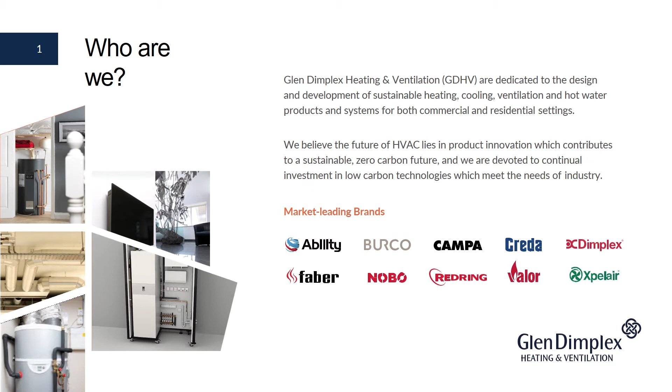As part of that research, we've produced a report launched this week which talks about how technologies are going to change, primarily in new buildings in the UK. And from that report is a summary of a CPD, which I'm going to present to you today. We have only 30 minutes for an hour CPD, so I've taken a number of the slides out, you'll be glad to know, rather than just rattle through it at twice the pace.

This CPD will cover the key drivers and the future outlook, what the Future Homes Standard actually is, and what the 2020 Part L and F review of the building regulations are on our way to it, and some of the other things that we can expect to contribute to that situation.

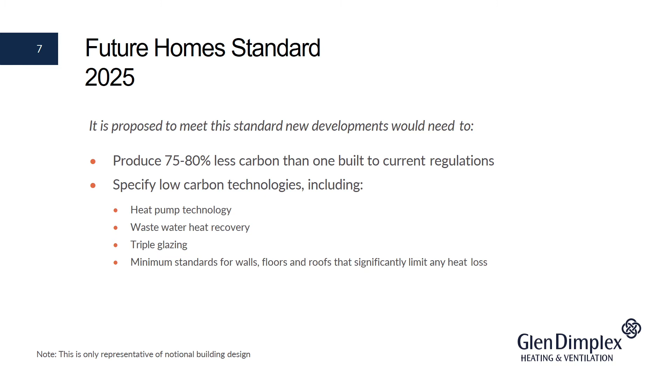So in summary, the standard looks to reduce carbon emissions by up to 80% over the current building regulations, and that's a significant change. To do that, it starts to introduce the technologies that might be required to get us there. So heat pump technologies, heat networks, electrification.

One of the ways that it starts to describe how we might move there in the building regulations is the concept of a notional building. But in my experience of talking to people about this, it actually confuses people more. There's a listed set of technologies which could be used to achieve the new regulations. They're not prescriptive, they don't have to feature there.

As long as all of the minimum requirements are met and the targets are hit, any mix of technologies can be used. And today, once we've covered what the regulations are, is really about modeling how some of those technologies look within our buildings.

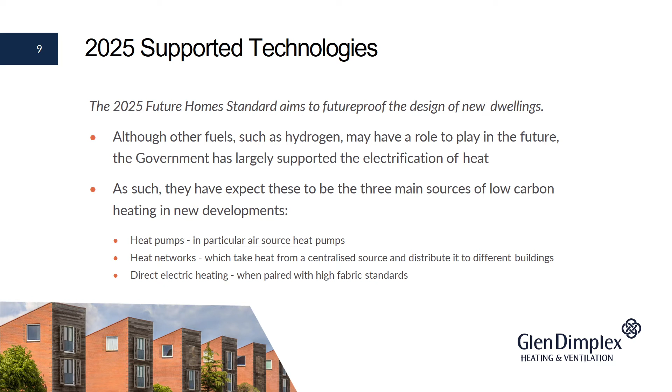So although other fuels such as hydrogen absolutely have a part to play in the future of our buildings, the government has largely supported electrification of heat. This is through heat pumps, heat networks, and direct acting heating. And the reason that electrification has really been supported is because of the change to our power grid.

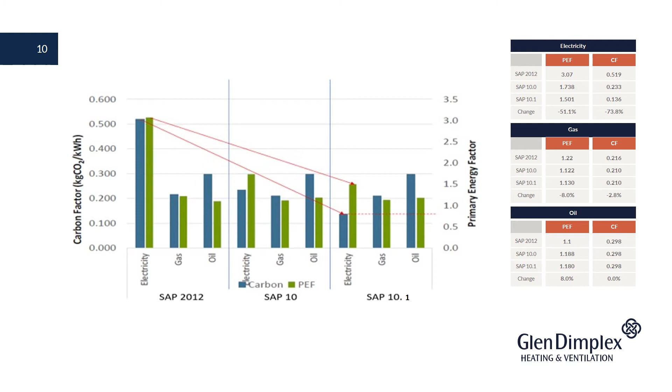That leads into Part L and Part F, so conservation of fuel and power and ventilation. The building regulations are being changed this year to meet some of the criteria that are required as a step towards 2025 and beyond. So in England, the plan is to release 5 consultations, including the Future Homes Standard. These will look at the new residential buildings, existing residential buildings, new commercial buildings, existing commercial buildings, and a separate consultation on overheating within buildings.

The first of these, which is what this report's based on, which is the new dwellings, that has consultation closed on 7th of February, and the response to that is due in the summer, and it will be applied by the end of the year. So regulation not known for moving quickly, but this certainly seems to be happening at quite a pace.

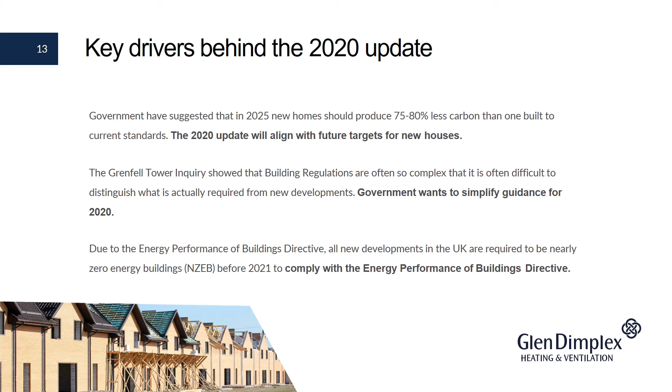And the main reason for that, although we need to get towards our targets early, is to be compliant with the Energy Performance of Buildings Directive. To meet the EPBD, we have to have NZEB buildings, so near zero energy buildings, and they must be measured in primary energy. Our current building regulation system uses carbon, and so that has to be changed to introduce primary energy as a factor.

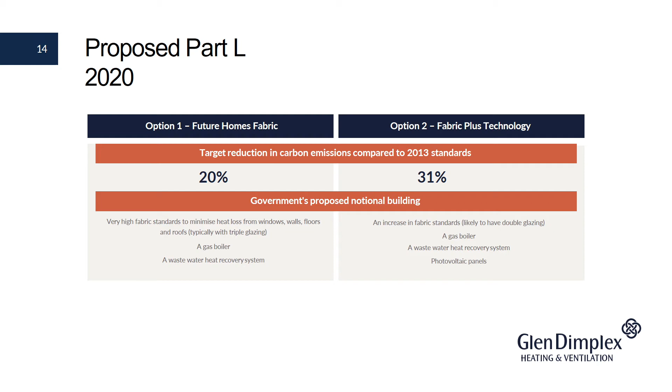The proposed changes to Part L have 2 options. Option 1 is a 20% emission reduction over current building regulations, and option 2 is a 31% reduction over current building regulations. Notional buildings are listed below. However, introducing primary energy and tightening up on carbon emissions are not the only targets, and the minimum standards for insulation and also for installed services have been tightened, and there's also been the addition of an affordability rating.

Now, in all of our modelling, we haven't been able to get a building to fail on affordability that didn't also fail on primary energy or carbon. So we can only assume that this is being introduced now for use later to start to address the differential in the cost of fuels. But the aim of this is to make sure that, despite being compliant, a building isn't too expensive for an owner to run.

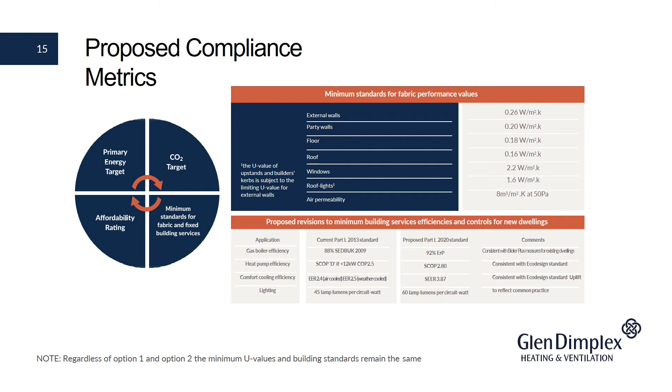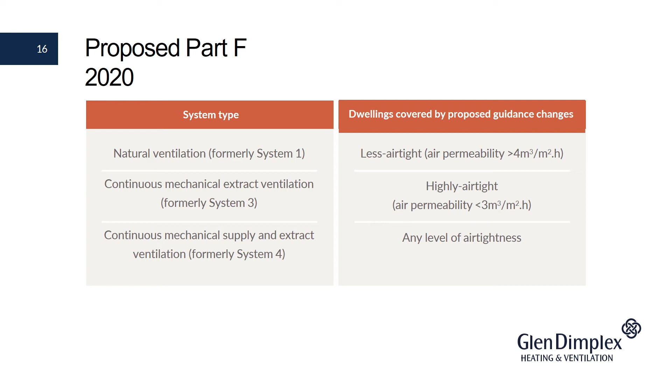The proposed changes under Part F are to simplify the systems, so removal of passive stack ventilation. It can still be used, but it will not gather as many SAP points and has been taken out of the guidance. And simplification of the guidance to show which system is best to be used at which point. Another process of simplification has been the number of bedrooms and changing the ventilation rate. So previously, building service designers had to make an estimation of the occupants in the room, and now all they need to do is work out how many bedrooms and have a rate to calculate.

So the change in regulations are not just about meeting the new targets, they're trying to make it easier to design and build buildings. In my opinion, to try and close that performance gap. If the regulations are easier to understand, the guidance notes are clearer, then you're going to get closer to what you're trying to design when you actually construct that building.

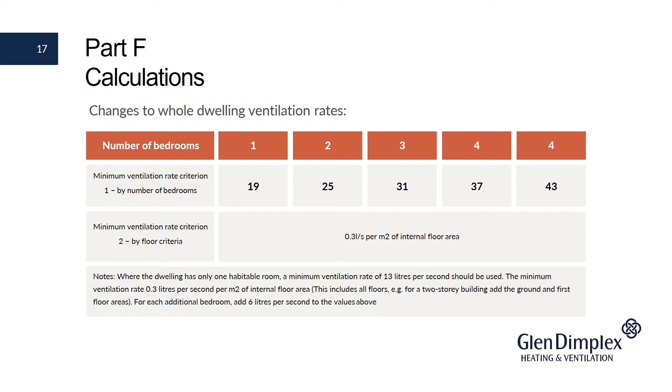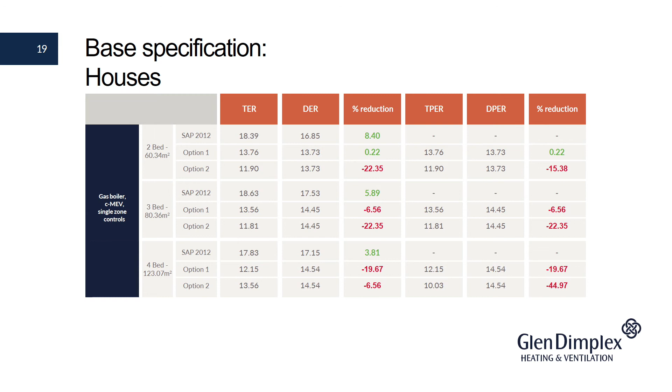At this point, I have to just explain quickly a little bit around hybrid heating systems, because a number of our models are based on hybrid and combined heating systems. The changes to electric and the way the government want people to specify means that air source heat pumps are a pass straight through all of this. If you're supplying most of your services, certainly hot water and space heating, through air source heat pumps, you're very likely to gain compliance. What we've looked at is a mix of systems.

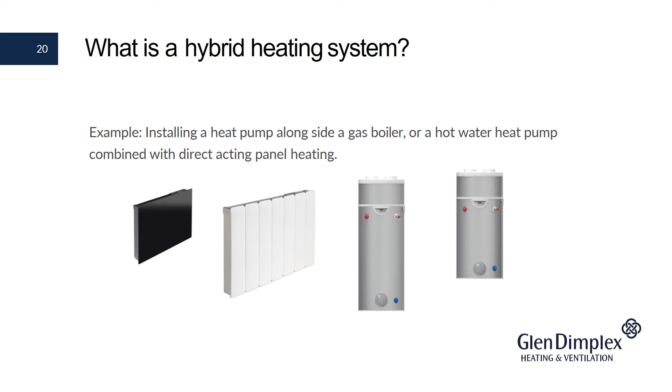So hot water applied to heat pumps. So the better insulated a building becomes, the higher the hot water requirement in terms of the total electricity load. So addressing that through renewable sources can typically give you a little bit more freedom when you come to looking at how you specify the heating and the space heating. So a hybrid system is not just a gas boiler and an air source heat pump. It can be a combination of any different types of system which can integrate between electric and gas.

Now, if you were really designing this building, you would probably go back in and start to look at the envelope of the building to get those gains. However, it doesn't really make sense. It would confuse our modeling if we start to change the building. So all we're adjusting is the technologies applied.

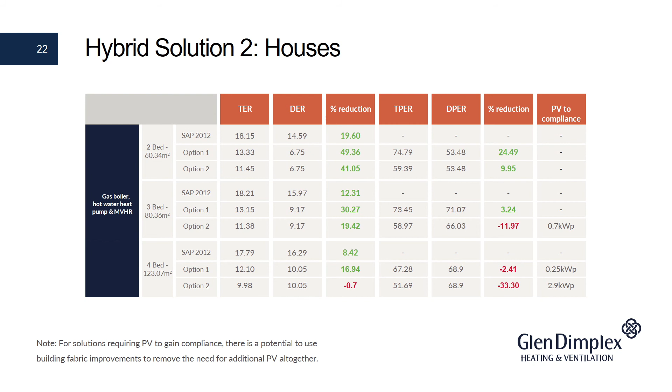However, building regulations, as you're probably well aware, are not the only thing that's going to drive technology within these properties. The Planning and Energy Act is another important thing to consider. One part of the consultation that went forward in February was a question as to whether local authorities should maintain the capability to decide on the carbon emissions, primary energy, as well as renewable generation that's allowed locally. So we're still waiting to see whether cities like Nottingham, who have decided to be net zero by 2028, are going to be able to apply these kind of factors. And even the London plan, in fact, could come under that.

On-site renewable targets could definitely be introduced, and also infrastructure constraints. Is there a gas network? Do you have the load required for the electric to heat these properties? And the usual budget and space constraints also.

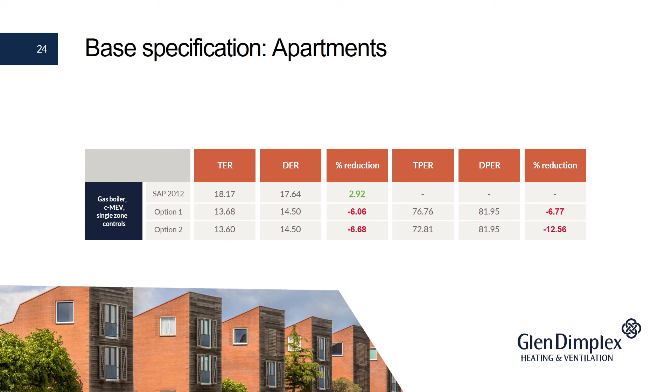So moving now on to apartments. This is a high-rise apartment with a traditional gas boiler plant, mechanical extract ventilation and single zone controls. It's just compliant to the current regulations, but not close when looking at either of the other two options. The London plan and what's happened in London has actually been a really good precursor for this, because we've been involved in a number of projects where, because of the carbon tax and potential for overheating, different technologies have had to be used.

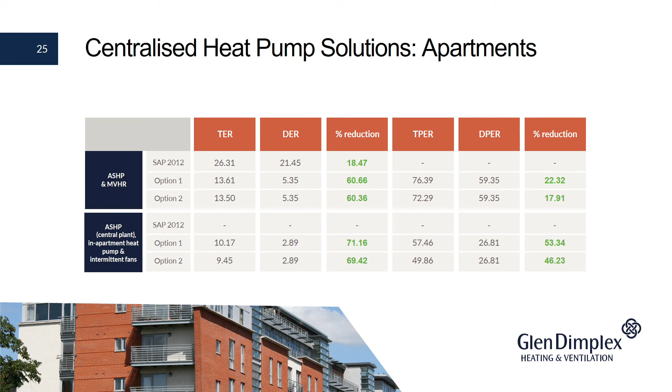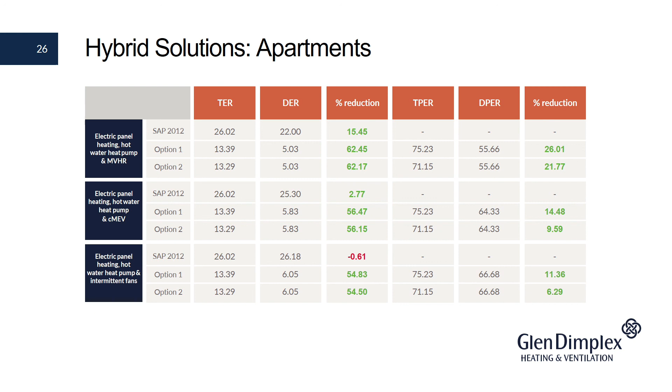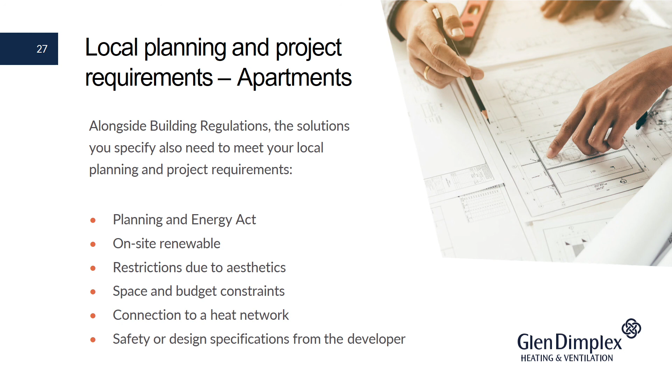Local planning regulations and restrictions are largely similar. However, space constraints, not just inside the apartments, but in and around the building, are also potentially an issue. And connections to heat networks are a consideration, particularly in London and cities and areas where that might actually be mandated if they're available.

So, in summary, significant changes to carbon and primary energy in their rate because of the changes in the power industry. That's going to change compliance, and the introduction of new targets is going to further add factors into what the traditional specification looks like moving forward. These are going to be introduced soon. The end of the year is when we're going to start seeing these systems become more common, and I think it's probably a safe guess that for that first step, in my opinion, they're going to go for option 2. They're going to want to get as close to 2050 and 2025 as possible. So many of these systems are already starting to be modeled and used out in the market now.

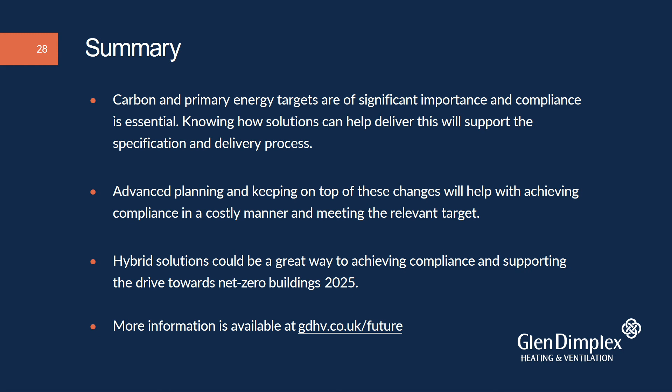I think that's everything covered. I'm wondering whether I took a few too many slides out of my 1 hour CPD, but I can't provide half certificates, so you'll all be glad to hear that that will still continue. I don't know if there are any questions from anybody on anything that's been covered. No? That's okay. I probably wouldn't ask a question either, don't worry.